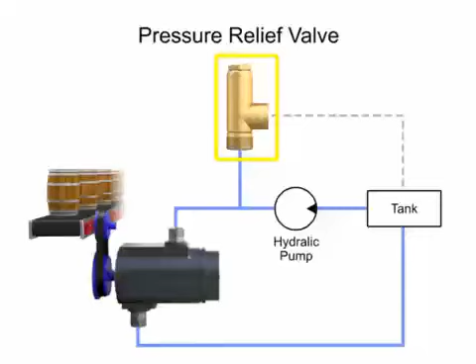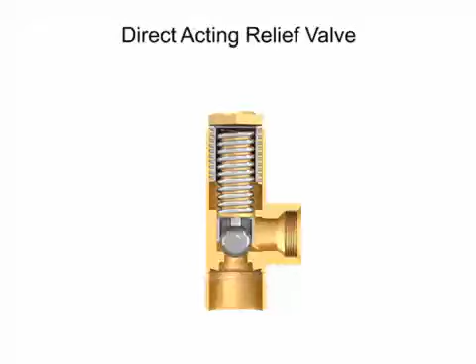Pressure relief valves fall into two categories: direct acting or pilot operated. A direct acting relief valve is held closed by the direct force of a mechanical spring. The spring force holding the valve closed is opposed by the system hydraulic pressure.

The cracking pressure is the minimum pressure at which the valve will begin to open. This pressure is set by changing the tension in the spring using an adjusting nut or knob.

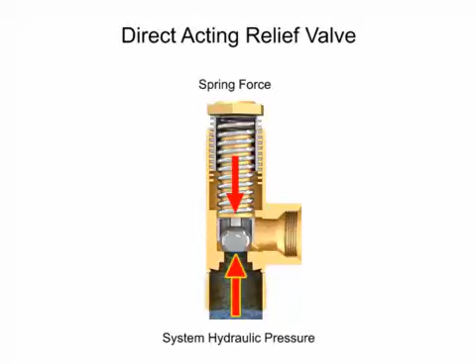As long as the system operates at a pressure at or under the cracking pressure, the valve remains closed. If the hydraulic pressure increases even a small amount beyond this level, the valve begins to open and fluid begins to trickle through. The pressure at which the valve is fully open is called the full relief valve pressure and is higher than the cracking pressure.

When the hydraulic fluid in the system reaches the full relief valve pressure, the valve will be fully open and all fluid is discharged through the outlet port.

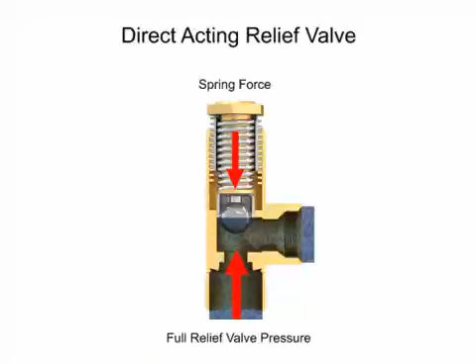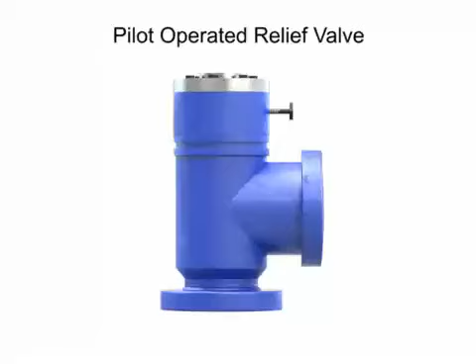A pilot-operated relief valve makes it possible to handle higher pressures and flow. It's also much smaller than direct-acting valves rated for the same pressure. This valve has two stages.

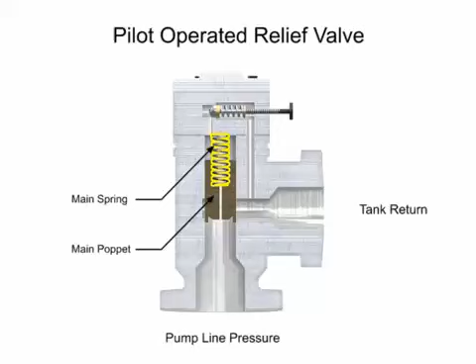The first stage is composed of the main valve with a poppet and spring large enough to handle the maximum flow rating of the valve. The second stage is composed of a much smaller direct-acting pilot valve, which includes a pilot relief poppet, pilot spring, and an adjustment knob. This smaller relief valve is usually mounted crosswise on the main valve body.

As long as pump line pressure is less than the relieving pressure set on the control knob, the pilot poppet will remain closed. Since the pilot poppet is closed, the pressure in the main spring chamber is the same as the line pressure. Since these pressures are equal, there is no pressure drop from one side to the other, and the main poppet also remains closed.

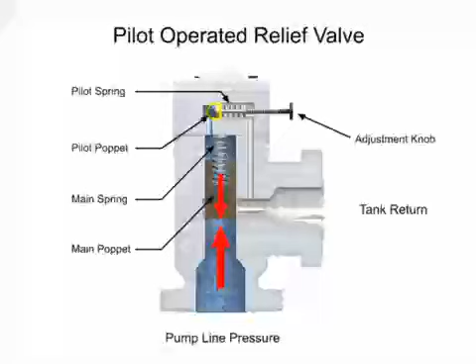When line pressure increases higher than the relieving pressure, the pilot relief valve moves to its open position. This allows fluid to flow from the pressure side through the orifice and across the pilot relief valve to the tank.

Once the pilot valve is open, there is now a pressure drop across the main valve poppet with a higher pressure on the pump line side. This causes the main poppet to move, allowing full flow through the relief valve.

The same is true in reverse. As the pump line pressure decreases below the relief pressure set by the adjustment knob, the pilot valve will close. This allows the main spool to close and restores a balance of pressure.

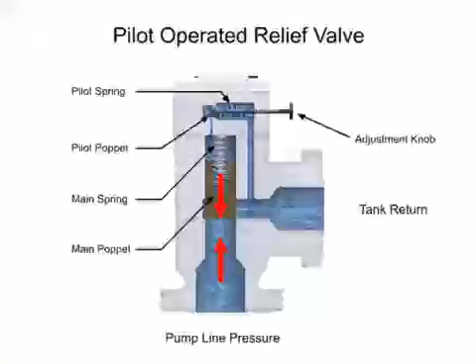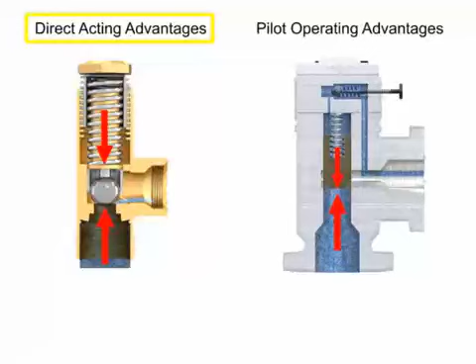Relief valves can be used anywhere in a hydraulic circuit where it's necessary to prevent pressure from exceeding a maximum level. Advantages of direct-acting valves are their low cost and fast response times to pressure spikes. Pilot-operated relief valves are advantageous due to their smaller size and ability to work with higher system pressures and higher flows.